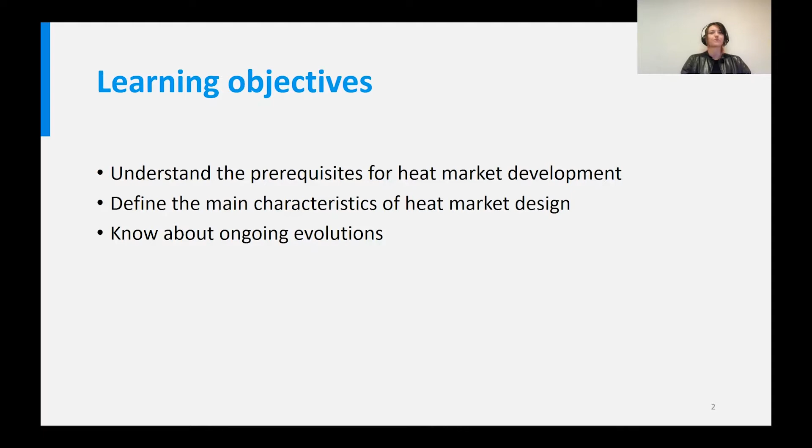In this video, I will present the example of the heat market in Copenhagen, Denmark. The objectives will be to understand what were the main drivers for opening up the heat market, what are its main characteristics, and its most recent evolutions. But first, let me give you a bit of background history.

The rapid expansion of district heating is a direct result of the 70s oil crisis, where Danish authorities implemented huge national heating plans to overcome their dependencies on oil imports for heat and electricity production. This resulted in the construction of centrally planned district heating that you can see in green on the map, powered by nearly 300 combined heat and power plants, or CHPs, that today supply 2/3 of the district heating demand.

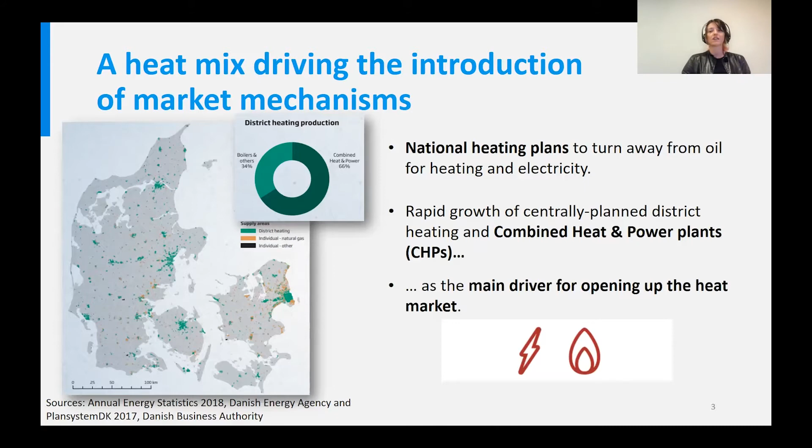This boom in CHPs was actually the main driver for opening up the heat market at the time of the electricity market opening in the 2000s. Indeed, because CHPs are facilities able to produce both electricity and heat at the same time, and because they are owned and operated by municipalities and therefore regulated, their participation in newly deregulated electricity markets was going against the newly signed directives and created a risk of distorting competition on the electricity market.

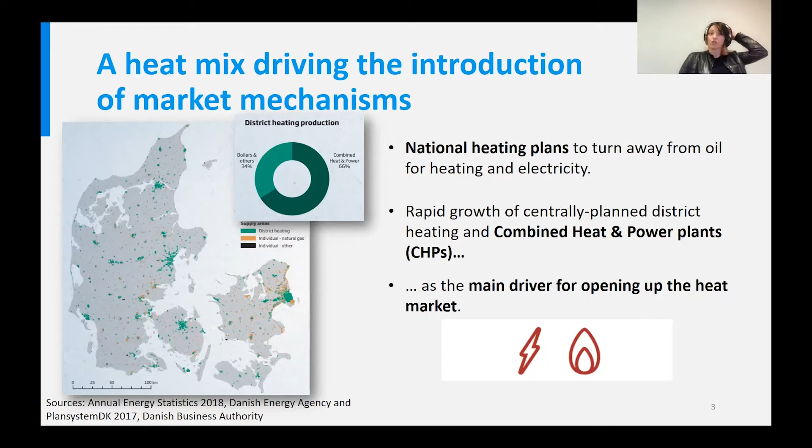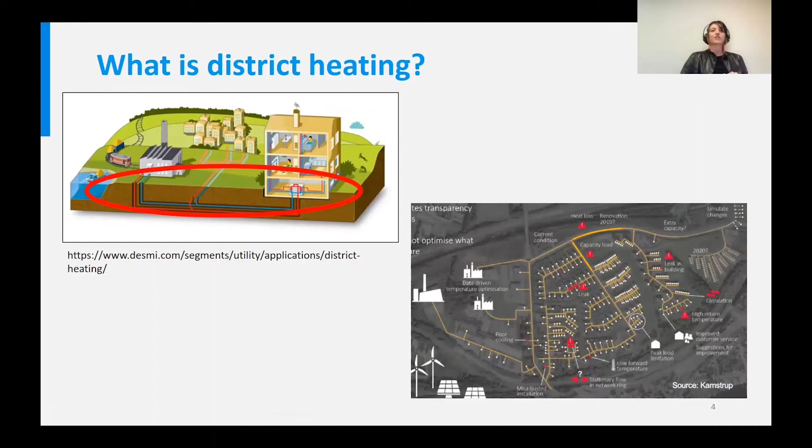Let's now step back 1 minute and define what district heating is. District heating is a collective heat supply used for space heating and hot domestic water. The hot water flows from the heating plants down to the buildings in insulated underground pipes. District heating networks are built on transmission and distribution pipes. The difference between the two levels refers simply to the physical specificity of the network, where heat, temperature, and pressure decrease the farther we are from the heating plants.

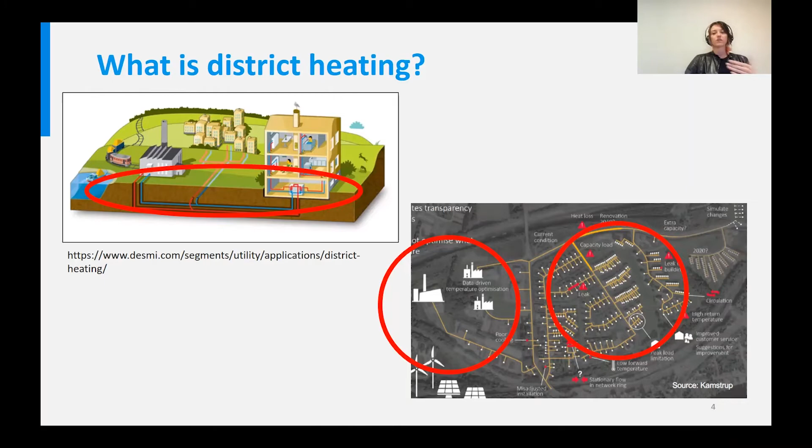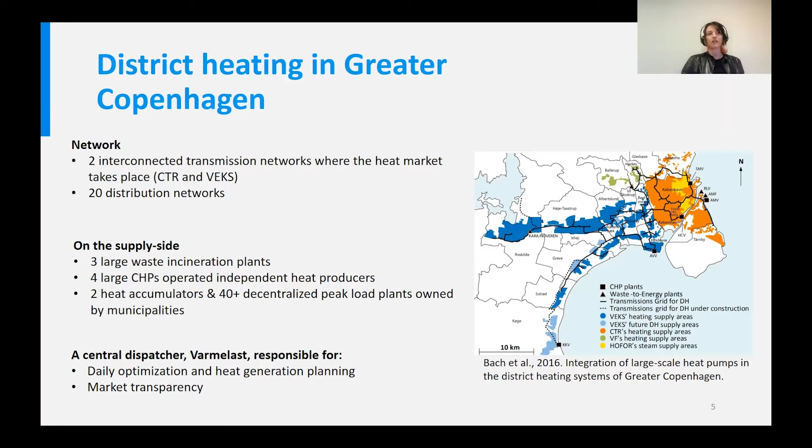In 2008, a heat dispatcher called Varmelast was introduced. Its role is to optimally plan and dispatch heat, to ensure full transparency on the energy flows, and to communicate the cost of operation that are declared by the market participants to the regulator. The heat market design in Copenhagen follows 3 steps: first, the day ahead, the intraday, and then the settlement.

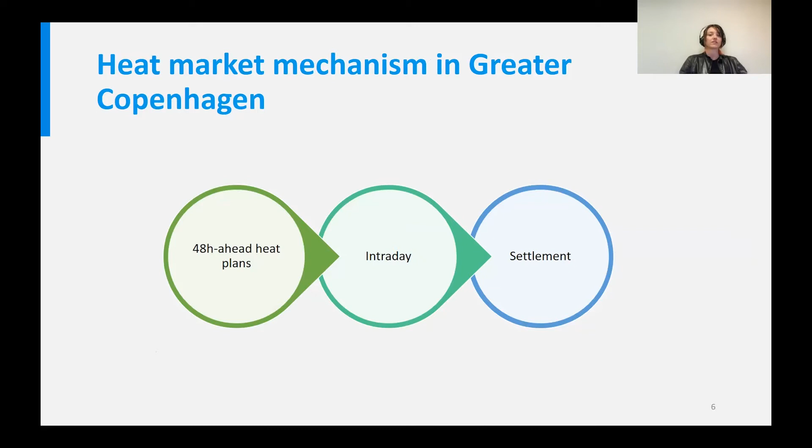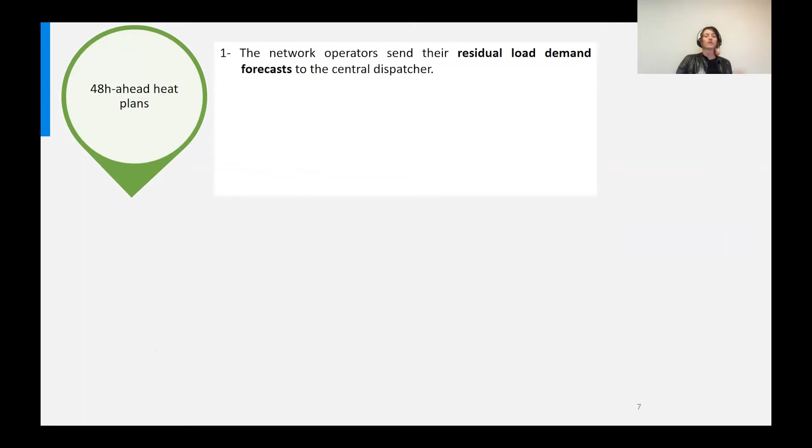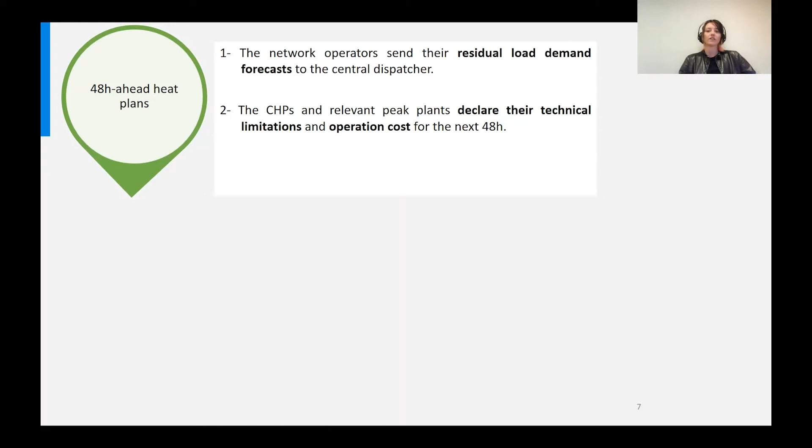On the day ahead, which is actually 2 days ahead, the network operators send their load forecasts to Varmelast, the dispatcher. The CHPs then declare the state of their generation capacity and their operating costs for each hour of the next 48 hours. And this very much depends on their simultaneous participation in the electricity market. CHPs must deduct from the operating costs they declare to Varmelast the hourly revenue they make from the sale of electricity. Based on that, Varmelast prepares a heat production plan for each hour that gives the optimal technical economic hourly combination of heat production on the overall system.

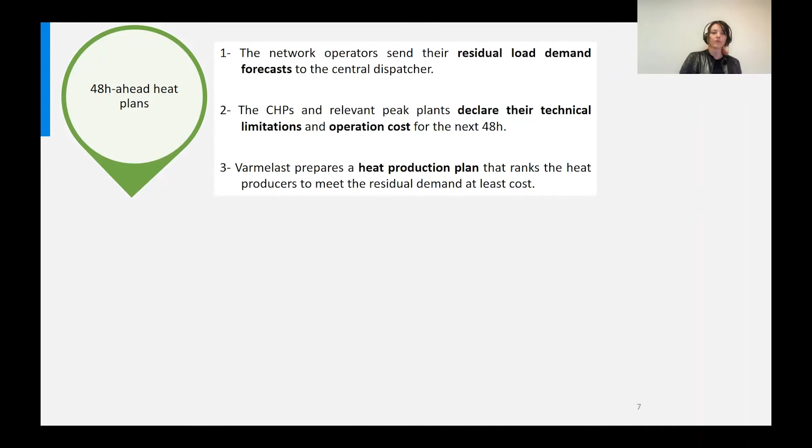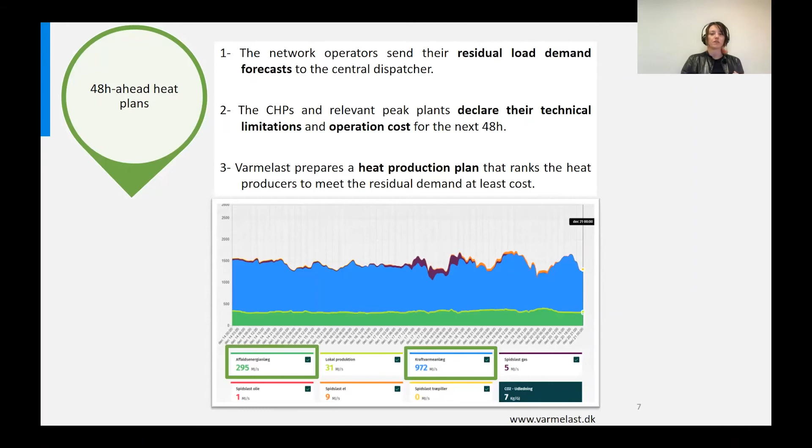At this point, it is very important to stress that the heat market is not intended at clearing prices and at paying producers. This will be done at the settlements, as we will see later. Now, on this graph, you see the contribution of the heat technologies during a winter week. In green, the waste incineration plants, in blue, the CHPs, and in purple and orange, the peakers.

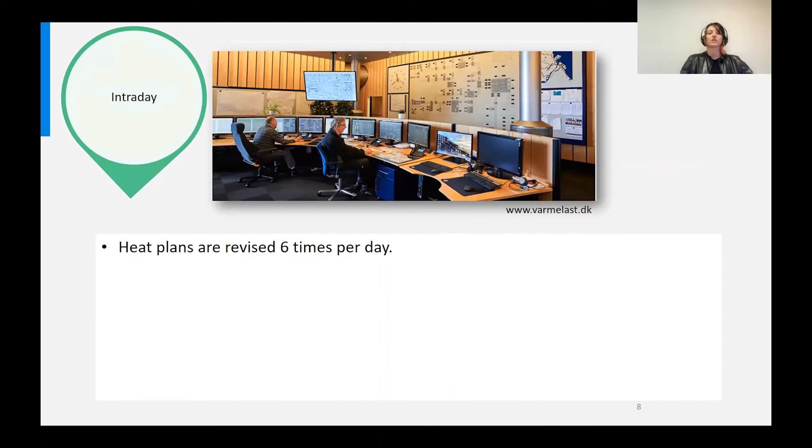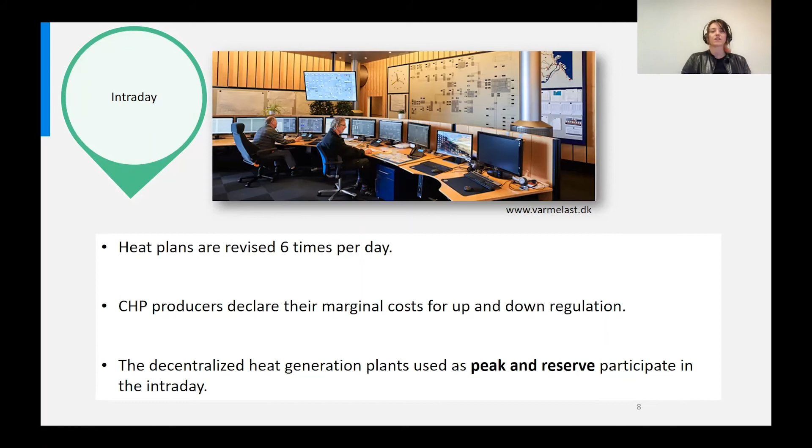The intraday market corrects imbalances. The 48-hour day-ahead plans are revised 6 times a day during the day of delivery to take into account any deviation in heating demand, electricity prices, and any potential issues at the heat plants. Here, all relevant plants, whether they are large or small CHPs or decentralized, can participate and are selected following increasing cost criteria. Finally, the settlement aims at matching heat supply and payment.

The payment for heat supply is defined ex ante in bilateral contracts signed between heat producers and network operators, and these are confidential. The contract sets a volume of heat to be delivered in a given month, and the price per unit of heat that remains constant until it is renegotiated by one of the parties. The settlement is made on a monthly basis, and in the end, lower or higher revenues resulting from the effective delivery as compared to what was indicated in the contract are counterbalanced at the next period.

Now a few concluding remarks and food for thought. In 40 years, district heating in Denmark has evolved tremendously to include more performant technologies. Today, district heating has become a critical instrument to meet the climate objectives, notably in replacing fossil fuel-based CHPs with biomass and investing in thermal storage and power to heat that store and use electricity surpluses coming from wind generation. Today, Denmark is developing new heat technologies, energy sources, and storage to meet its full heat decarbonization targets.

In parallel, more cross-sectoral integration is in the making between heat and electricity, primarily through centralized heat pumps paired with renewables. A new regulatory framework is also being implemented to recover heat losses from large businesses such as data centers or big supermarkets. The special place of cogenerators at the interface between heat and electricity was the main driver 20 years back to introduce market mechanisms in the heat market. Now, how the multiplication of those new players having the possibility to sell or store heat will affect competition and current market rules remains to be invented.